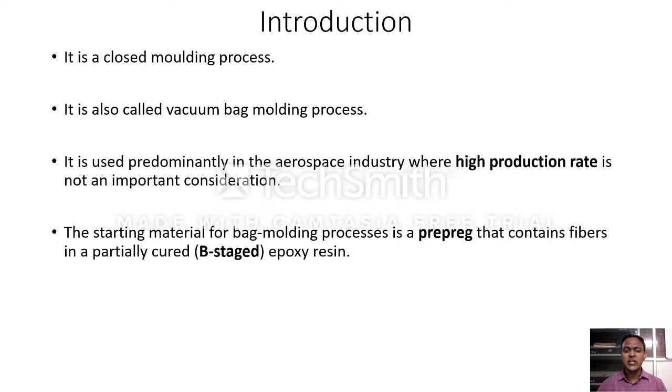So coming down to the starting material that is used for this process, the starting material used is a prepreg. Hope you all may be knowing what is a prepreg. This process involves the use of a prepreg, which contains the fibers in a partially cured B-staged epoxy resin. Now we will have a brief discussion about what is meant by prepreg before going into the bag molding process. What is a prepreg?

Prepregs are the pre-impregnated fibers. When the fibers are already pre-impregnated in a resin and then it is cured, whatever product we get, that is the prepreg. So prepregs are the ready-made tape composed of fibers in a polymer matrix. After we take the fibers and mix it with the polymer matrix, we will cure it, but we do not completely cure it. We do only a semi curing. So these prepregs are partially cured B stage materials, and so they require cold storage to prevent complete curing.

We deliberately make it partially cured because for certain processes we do not want a complete curing, because once it is completely cured, since it involves the use of a thermoset type of matrix, it is not possible to restore it back to the B stage or A stage. So this prepreg contains a release film which keeps the prepregs from sticking to each other during storage, so that a prepreg will not stick to other fibers or other prepregs.

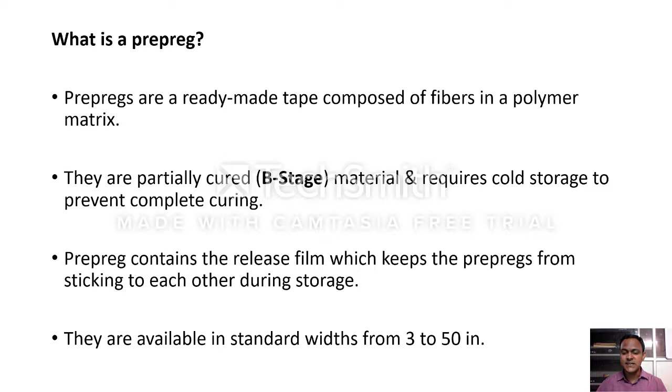Now coming down to the process, this bag molding process involves multiple steps. The first step is the laying up process, where we lay up the material, and the second step is the autoclaving step. But this laying up process involves multiple components. So we will see what is this laying up process.

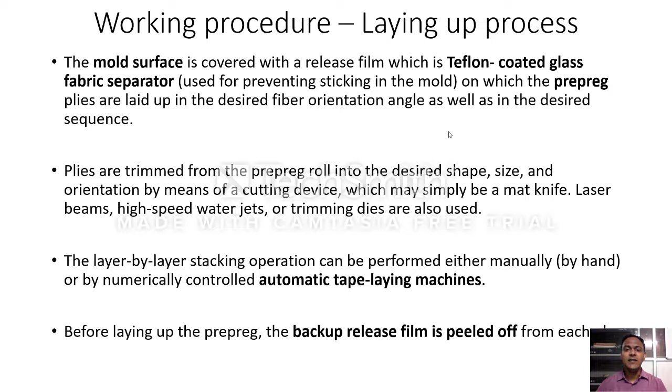So you do not need the backup release film, which will not allow the prepreg to stick to another prepreg. So you need to remove it. You will peel off that backup release film and only then arrange it. This is the laying up process. Here a slight compaction pressure is applied to adhere the prepreg to the Teflon coated glass fabric or to the preceding ply in the layup.

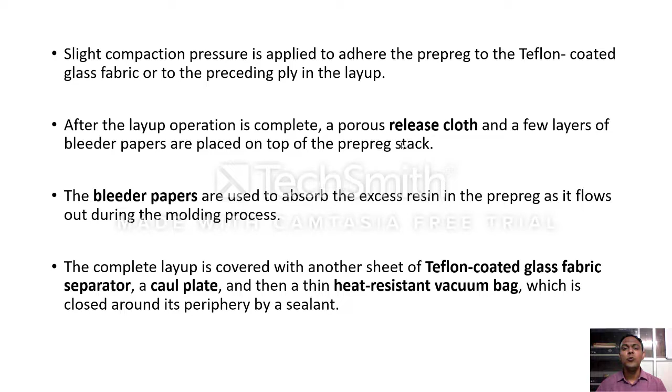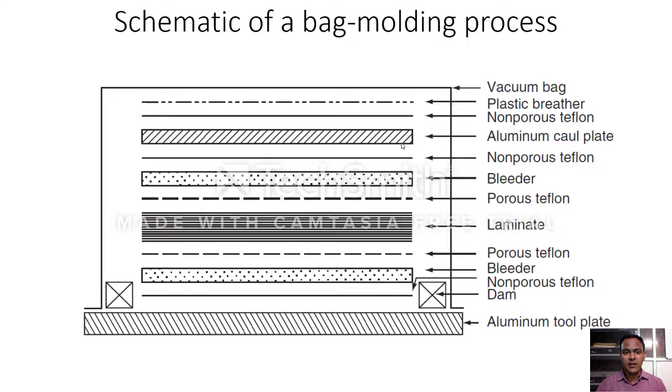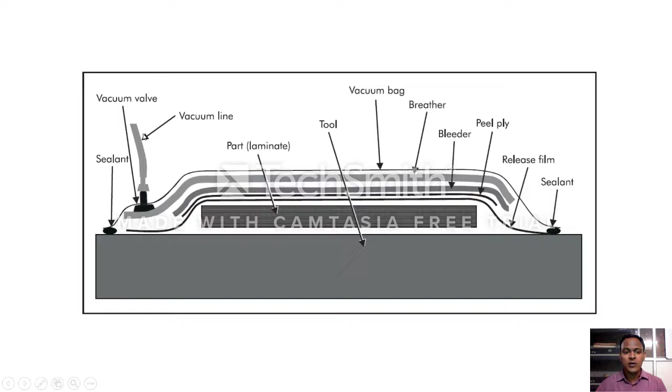So this is the schematic of the bag molding process, where I have explained each and every component that is used for this process. I will show you one more diagram, shown in a different manner, where you have a mold, a tool here. Over that you have stacks of prepregs, arranged like this, written here as a laminate, and over that you have a porous release film, and over that a bleeder, and over that a breather material, and finally a vacuum bag, and a sealant also, which is a polymeric tape, and here there is a vacuum line to suck out the air that is entrapped in the prepreg.

So the next step is the autoclaving step. Now we have arranged everything, covered it in a bag, and applied the vacuum also. So what is the next step? We need to do the curing. The semi-cured resin that is present in the prepreg has to polymerize completely.

So the entire assembly is placed inside an autoclave, where a combination of external pressure, vacuum and heat is applied to consolidate and densify the separate plies into a solid laminate. So you have to provide an external pressure also. You have already kept all the prepregs along with the bleeder papers and release cloth, and over that you have kept a caul plate also to give some pressure, and that alone is not sufficient. You have to give some external pressure also when you do the curing process.

So an external pressure has to be provided, along with the vacuum, and heat also has to be supplied, so that because of the action of the external pressure, vacuum and heat, the prepregs get consolidated and densify to form a solid laminate. As I've already told you, vacuum is applied to remove the air and volatiles. These volatiles, like solvents used during prepreg manufacture, have to be removed, while the pressure is required to consolidate individual layers into a laminate. The application of external pressure makes the prepregs consolidate one over the other.

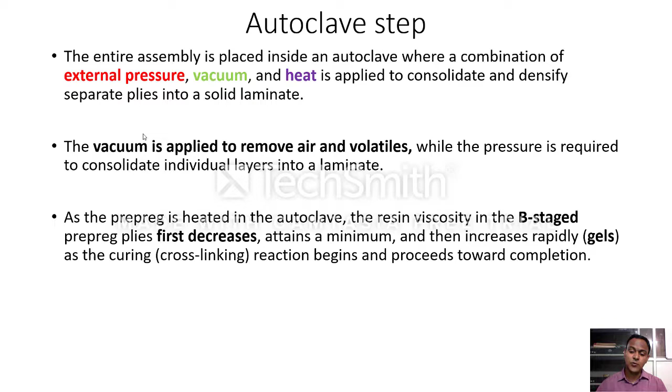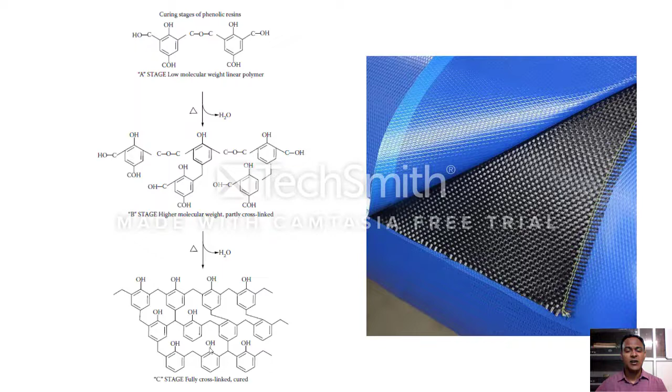So initially the resin melted and its viscosity got reduced. But once you keep it for a long time, like a dwelling time, where you keep the total assembly inside the autoclave for about 1 hour, the viscosity will increase. It will become more solidified, where the curing or cross-linking takes place. As I have told you in the previous diagram, we are at the B stage. We will finally convert the total assembly into the C stage, where the final complete cross-linking takes place.

So now for more clarity, I will show you a small video from YouTube. You can see practically how this bag molding process is done. In this process, they have not used prepregs, but sheets of fibers where they have applied some resin. But overall, from the broad perspective, this is how the bag molding process is performed.

Welcome to the Jamestown Distributors Workshop.

In this project, Mike was creating a gutter for a hatch using the vacuum bagging technique. This method can be useful in many different applications, so take a look at this instructional video for some helpful tips. First, Mike covered the entire mold with tape. Then he applied wax with a rag.

This is like a release film.

To create the bag, Mike used one sheet of vacuum bag film and used double-sided tape to close the sides.

This is the sealant, which is the polymeric tape, and this is the bag.

Then he mixed the epoxy with a ratio of 2:1.

This is how the resin formulation is done, the resin mixing.

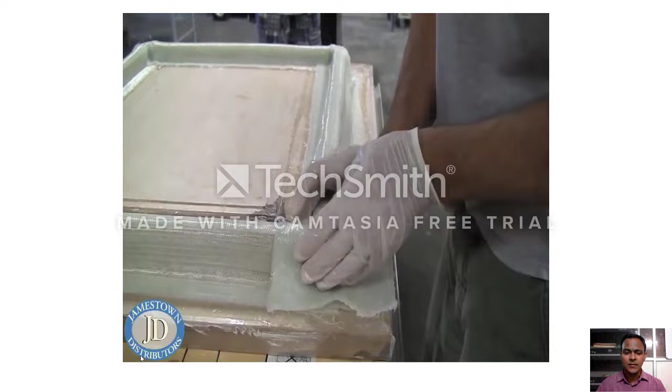Here's a JD workshop tip for you. Place an ice pack in a second tray under the resin to keep it from kicking. Mike then applied the resin sparingly with a plastic spreader to the fiberglass cloth. The strips were then laid down over the edges of the mold, making sure the corners were not bunched up. Slits were cut in the cloth around the corners to help them lay flat to the mold.

So this is the laying up process and trimming of the plies. So here you can see how they are cutting the extra.

Here's another JD workshop tip for you. When working with resin or any other hazardous material, wear at least 2 pairs of gloves so you can remove the top pair and still work with the rest. Next, Mike laid down strips of release fabric over the cloth.

This is the release fabric. He used a paintbrush to ensure it sticks to the resin. Again, slits were cut in the corners to allow them to lay flat. Then strips of bleeder film were laid down over the release fabric.

This is the bleeder film, you can see.

Mike used a spray glue and laid down the breather.

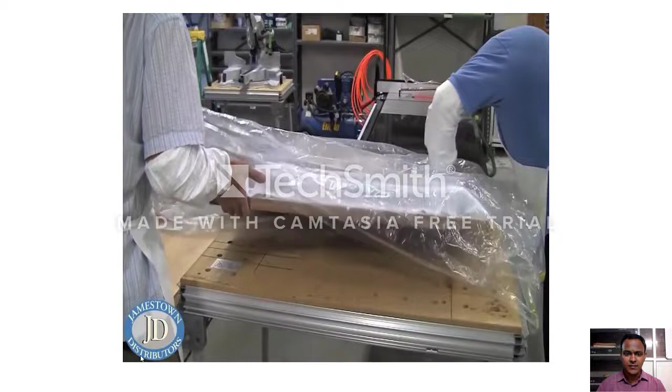The finished mold was then placed inside of the bag. You can see how they are keeping it inside the bag. They have arranged everything. The breather was then taped around the end of the vacuum tube to ensure an even airflow. The tube was then placed in the bag and taped shut.

Then the vacuum was turned on, and Mike and TJ made sure that there was enough of the bag to cover the corners before all of the air was removed. Now you can see after the air is removed how it became compacted. And this vacuum was left on overnight to allow the resin to harden.

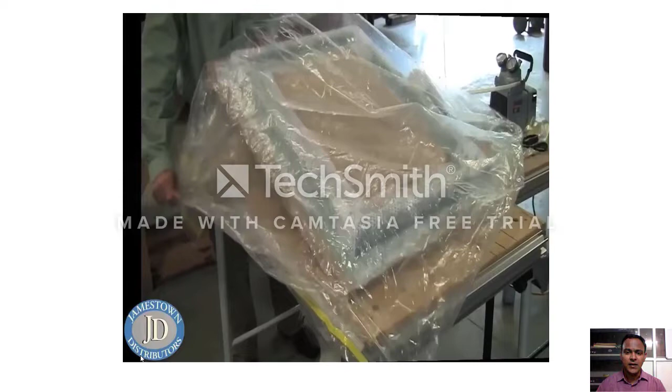And this mold was then removed from the bag, and all of the strips of material were taken off. So like bleeder papers, porous release films, whatever is kept, that has to be removed. The gutter was then pried off of the mold using plastic spreaders, and it was ready to go. But here they have not shown that curing process, but it is cured.

Now that you've seen Mike create a gutter using the vacuum bagging technique, hopefully you have a better understanding of this procedure.

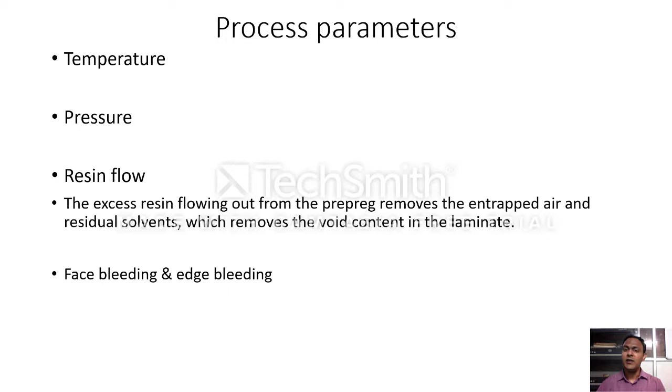And now, what are the advantages of this process? Structures fabricated with traditional hand layup techniques can become resin rich, and vacuum bagging can eliminate the problem. Since you are using a vacuum and also external pressure and temperature, it will not allow resin buildup. But the hand layup process involves the use of more resin and becomes resin rich, which is not a preferable situation in composite manufacture. It will not give good strength properties. We always require the resin to be minimal and the fiber to be maximum.

The next advantage is, additionally, complete fiber wet out can be accomplished if the process is done correctly. So here fiber wet out is also possible. The fiber can be completely wet if the process is carried out correctly. And improved core bonding is also possible with vacuum bag molding. The resin gets bonded till the core of the material, so that we get proper binding of the resin with the fiber surface. So these are the advantages of this bag molding process.

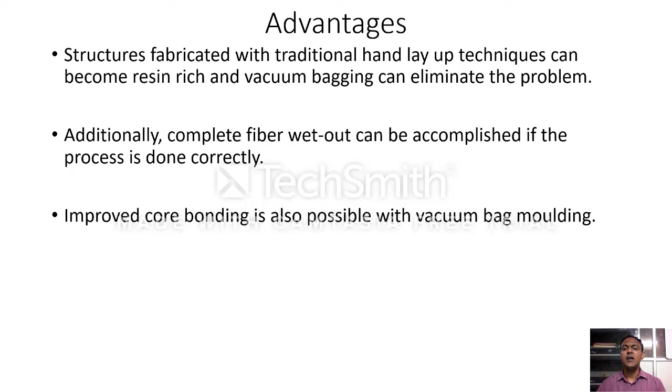And there are many disadvantages associated with this process. Since we are using mostly thermoset resins, and thermoplastics are also involved, if you use an epoxy resin, for example, the process already involves too many steps. The laying process involves the arrangement of more components, so it will be a time consuming process. And next is the complexity. It is a complex process because it involves the arrangement of multiple components.

Another disadvantage, in continuation with the complexity, is that it is difficult to get proper orientation in each ply, because since you are arranging it by hand, even if you do it in an automatic manner, it is difficult to get the proper fiber orientation. The next disadvantage is ply laying up. If it is done by a manual method of laying up, it may lead to improper ply layup, and it will become a problem. A trimming operation is also involved. You have to trim all the prepregs you are arranging, so the trimming operation is also a disadvantage in this process.

The next disadvantage is filament crossovers. The filaments will cross one over the other, so that will also become a problem when the composite finally gets manufactured. So there are multiple disadvantages associated with this bag molding process.

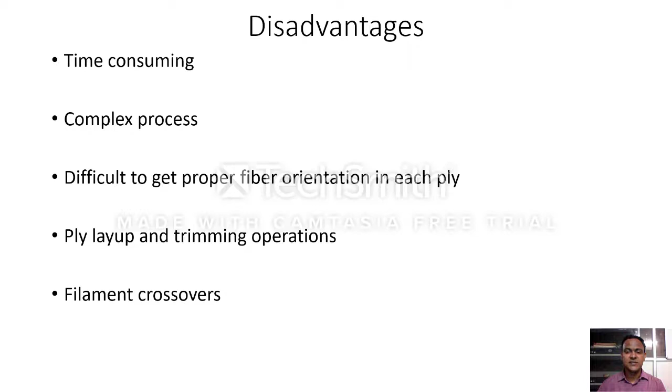And coming down to applications, the bag molding process is mainly used in the manufacturing of advanced composite parts. As I have shown you in the first slide itself, this process is used where a high production rate is not an important consideration. Only there does this process need to be used. So it is used for making aircraft components, and military products can also be manufactured from this process. So it is not used for manufacturing all components, only selectively for certain types of components where the production rate is not important.

So now we have come to the end of the lecture. This is about the bag molding process. This bag molding process involves the use of a vacuum bag. We use a vacuum bag to remove the excess air that is entrapped in the prepreg to help the molding process.